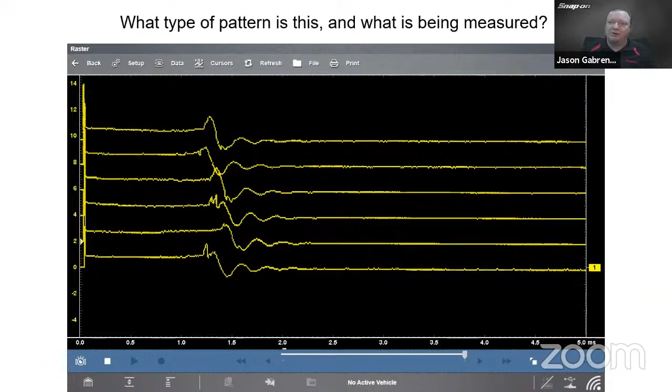So the tech decided, well, maybe we need to change the driving conditions, change the engine conditions. So they decided to do a brake torque - you put it in drive, smash the brake, smash the gas, get that engine to torque up real good and put it under a good load, and see what happens. So this pattern is what came of it.

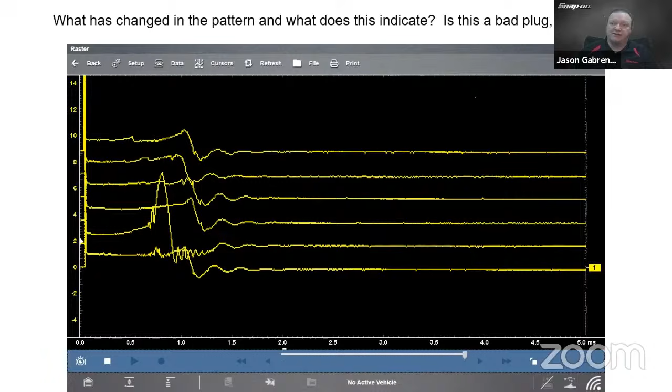So on this one cylinder - this was cylinder 5 - they detected by doing this test that there's a lean condition on this cylinder. So it wasn't even an ignition problem, it was actually a fuel delivery problem, and it ended up being a bad fuel injector on that cylinder. It wasn't spraying enough fuel under a load. So it doesn't even have to be an ignition problem that you find while doing an ignition test. In this case, it was a fuel problem. So then we'll talk through this as we go.

All right, let's talk about how an ignition system is set up. Really, you can divide an ignition system into two halves. We have a primary circuit and we have our secondary circuit. The easiest way to split it in half is right down the middle of the ignition coil.

Because we have both a primary coil and a secondary coil inside the ignition coil as well. So pretty much the primary circuit is anything attached to the primary coil or that controls the coil. Think battery, that's where our voltage starts. Alternator, ignition switch, ignition control module, cam sensors, crank sensors, pickup coil if it has it, any sort of triggering device, also the ECM depending on how it's set up. So all of that is considered the primary side of the ignition system.

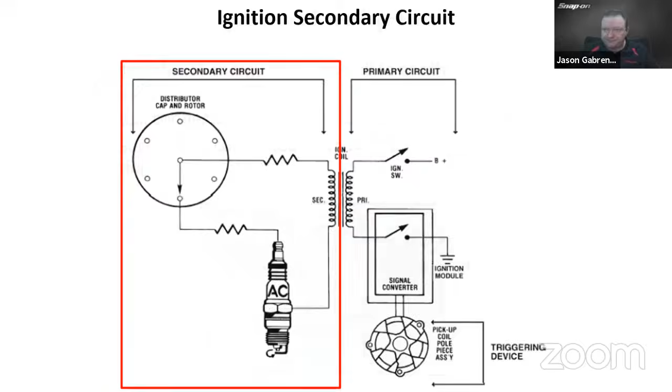And that brings us to mutual induction. This is the essence of how an ignition coil works. It's a transfer of energy from one coil to another when they're placed close to each other. The coil connected to a voltage source is called the primary winding, and a second coil connected to another circuit or the output side would be the secondary winding.

So due to that, when it transfers the energy over, we'll have some math go on. We have 14 volts in, 14 amps in, gives us 196 watts of energy. When it transfers, the energy stays the same, 196 watts total. The volts go up by a factor of 100 because it's 100 to 1. So 14 volts gives us 1400 volts out, and then the amperage goes down by that factor of 100, so we have 14 hundredths of an amp.

So this is how we get 10, 20, 30,000 volts out of a coil. It's just the difference in windings in between, because generally on most automobiles you're going to have maybe 14 volts coming in and maybe up to 14, 15 amps coming in, probably not much more than that because the alternator puts out about 14 or so volts. So it starts charging there, and because of that step up, we have many more windings on the secondary side that gives us that extra voltage.

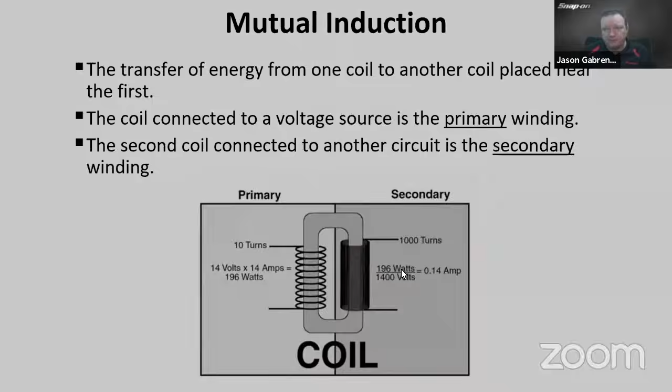So here's a little animation that kind of describes how it works, a very simplified setup. We have the switch - when the switch is thrown and completes the circuit, we have electricity going into the primary side of the coil, that's dwell. It will generate a magnetic field. When we release that energy, release the electricity, that magnetic field collapses and it goes over to that secondary coil, which gives us enough voltage to cross that larger gap on the other side. So that is a super simplified version of how that works, but that's how it works.

Using this mutual induction principle means that whatever affects one side also affects the other side. So if I have a problem in the combustion chamber, I'll be able to see it on the primary and the secondary side. So here's an example graphic here.

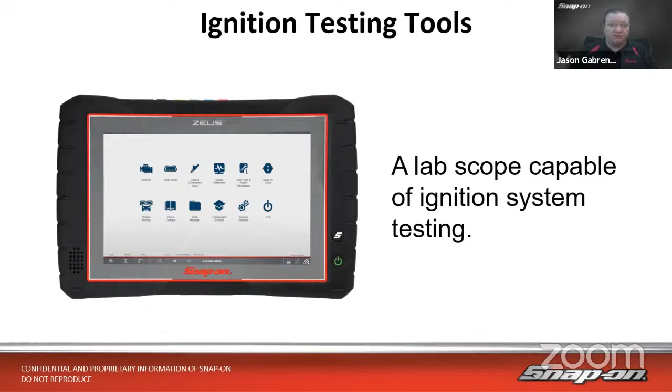So once we've decided on whether we're going to test primary or secondary, what do I need in order to test the ignition system? Well, first off, we need a scope capable of ignition system testing. So any of our tools that have a scope in them are able to test at least single cylinder ignition. So Verus, Zeus, Verdict, Vantage, Modus, Triton - any of those tools will be able to test secondary ignition. The 2-channel tools are able to test a single cylinder, and then the 4-channel tools also have a built-in ignition scope inside them. The Verus and the Zeus at this time would have an ignition scope built in.

What else do we need after we have a tool that can perform this function? Well, we need some adapters. At the bare minimum, you need this adapter cable right here. This end plugs into the tool, whatever channel we're using. That's the ground. And then you see there is a male, what we call an RCA plug on the end. So all of the adapters have a female RCA plug on them, so we can simply plug it in there and then attach it to the tool.

This is an inductive pickup probe, or a capacitor probe, sorry. This is designed for using on a vehicle's spark plug wire. This end of the adapter plugs into the other end there. But we have found, as time goes on, you can actually unscrew the end of this, take that off, and then you end up with a little metal nub at the end. And that little metal nub can be put on top of a coil, and you can measure those coils as well on a coil-on-plug vehicle, just using it like a stick or a wand.

So kind of a nice little dual use. You may even have one of those in your toolbox. We've had these around for a very long time, and they still work with the tools we have.

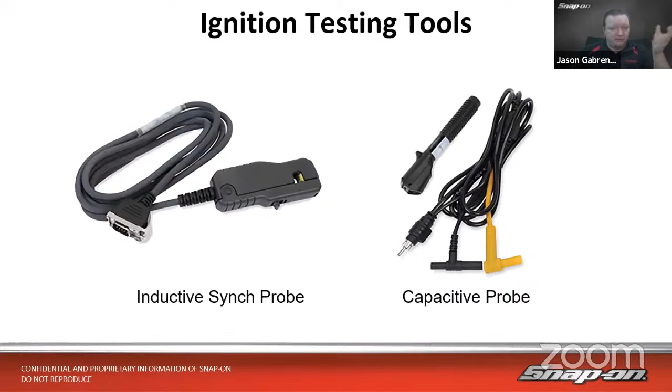Also, an inductive sync probe - this is good for doing multiple cylinders at the same time. This would plug in on the top of a Verus or a Zeus, that funny looking connector on the top of the tool, that's what goes in there. So we would use that around a spark plug wire, or you could also use it on a coil-on-plug vehicle for the trigger for the coil. You can put it around that trigger wire as well, and that will also tell the tool where number 1 cylinder is, so it knows the firing order, needs to know where number 1 is. We also have a multitude of other adapters we could use for coil-on-plug testing.

This first one here is a wand or a stick pickup. You could touch the top of a coil and it would work like that. Or if you had an inline 4-cylinder, or 2 banks on a 6-cylinder, or 2 banks on an 8-cylinder, as long as I can get it across the top of all the coils in line, I can measure all the coils at the same time.

The most economical way to get into secondary ignition testing would have to be these flag pickups right here. They're available in singles, doubles, and triples. They have a male end and a female end, so we can daisy chain them together. If you were here at the very beginning, we showed a little video on how to hook these up. So male end, female end, and then you can just daisy chain them together to get however many flags you need.

We also have 11 different part numbers of vehicle-specific coil on plug adapters, anywhere from a Ford or a Lexus or a Volkswagen. There's also the most popular one, I think, the COP1. That's for the Ford coils that are round and have the little flat spot on the side where the plug goes in. It clips right over that flat spot and allows you to read the coil from there. There's also one for, say, GM HEI, so if you have any of those, you could use that as well, getting right to the coil at the top of the cap. Multiple different versions for multiple different vehicles, and there's a couple that are even adjustable, so they fit multiple vehicles. Definitely something to check out if you're interested.

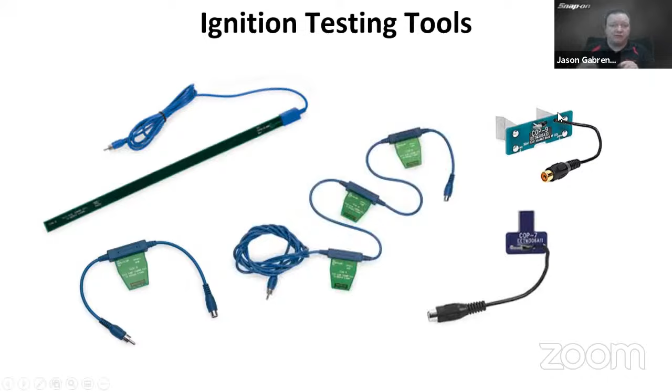We also have this SIA 2000. You may have seen this before, it's been around for a while. It was originally designed for what we call waste spark vehicles. On a waste spark vehicle, think back to late 80s, early 90s, mid 90s GM vehicles, many of those cars had these waste spark systems, the coil packs with the 2 towers that clipped onto the ignition control module. They'd fire both towers at the same time, one on the ignition stroke, one on the exhaust stroke of a companion cylinder. So one side is getting a negative polarity, the other side is a positive polarity.

The back of this tool is actually marked with a plus and a minus. You plug in the negative side to the negative side, the positive side to the positive side, and you can see all cylinders on the screen at the same time when they fire. Newer versions of these also come with 2 umbilicals that plug in on one side, and they have 4 wires each, and those are male RCA adapters. So you could use up to 8 of those coil on plug individual flag pickups, if you will, with this tool as well. So it kind of gives, once again, another dual expanded use on that.

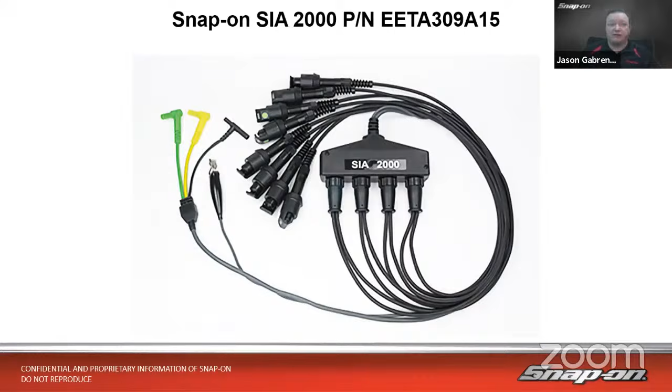So that is available. Once I have all of my adapters and my tools ready, how will I go about approaching testing this? There are 4 main patterns that we would be using when testing ignition. The one that anyone can do, as long as they have a tool with a scope, would be single cylinder ignition. This allows us to see 1 cylinder, maybe 1.5, 2 cylinders, depending on how we have it set up. But that's really used for voltage comparison: how high is my firing line, how's my spark line look. We can take a look at the pattern using that single cylinder.

And that's the one that you'd want to look at. So it allows you to test that way and compare that way.

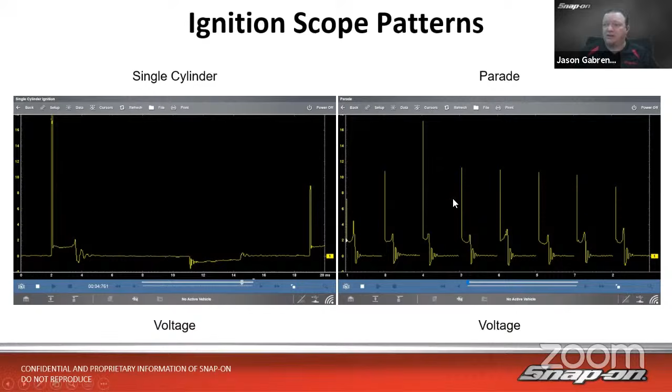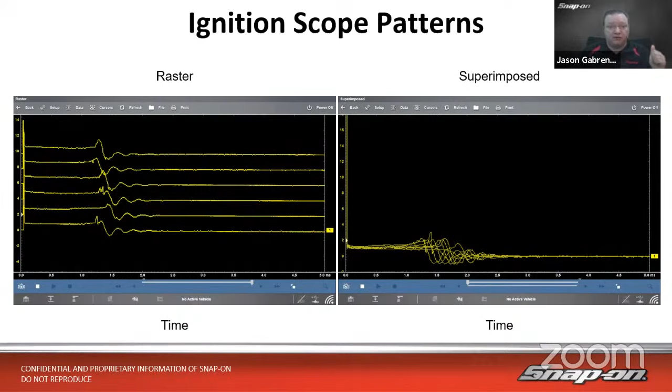The raster, the superimposed, and the parade patterns are available on the ignition scope tools, so on the Verus and the Zeus. As I said, everyone else can do the single cylinder.

So once I decided how to test it, what tests can I do? First off, we have a primary voltage test, and that is very simple because we don't even need any adapters. We just need maybe a back probe in order to back probe at the coil or the coil connector. So in this case, the coil on plug vehicle, we have a back probe going in there, and we are going to test it on the voltage supply side to see the primary voltage going in.

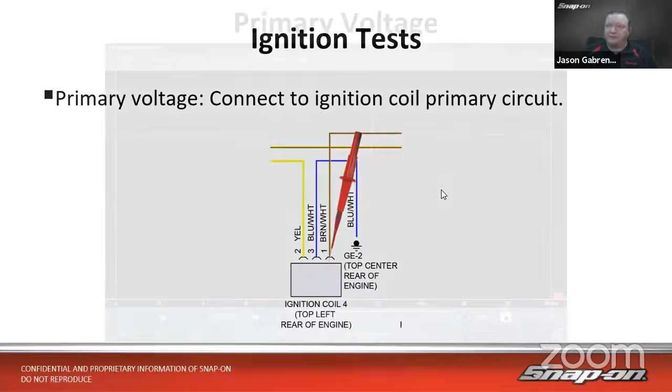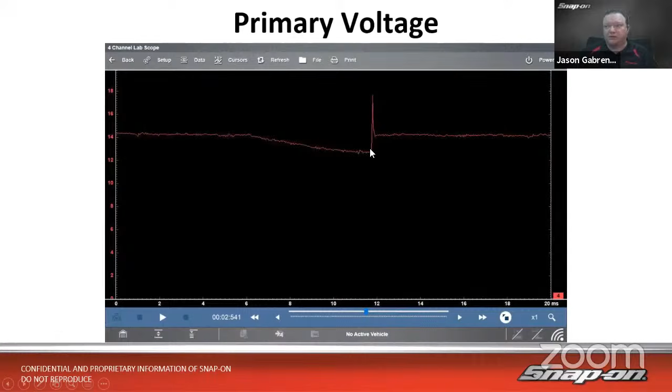Now in this vehicle, it works a little bit differently than some other vehicles. So when dwell starts on this, the voltage starts to go down, and then when it fires, it goes up. It actually starts to drop because it's storing it in the coil, and then it fires. And then we don't see the spark line there.

If we were to overlay it with the secondary side, here's my secondary on the bottom. So there's where dwell starts, there's my dwell, and then there's my firing line there. And then we can see all of that occurring. So that's primary.

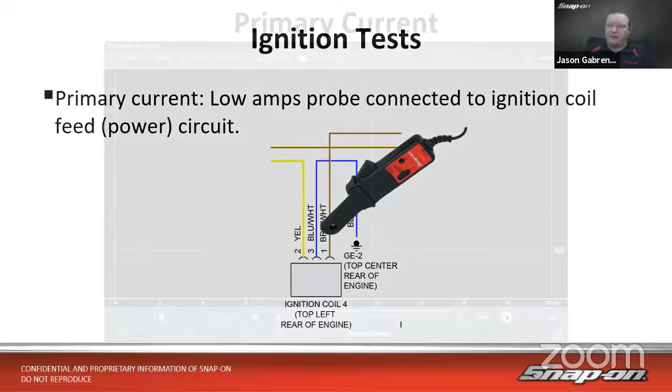Secondary side, primary current test would be the second test that we're going to do. So you hook a low amps probe to the ignition coil feed circuit, the power circuit, the same wire we used before for the primary side. You hook it in there around the wire, and you will see the coil current going into the coil.

So this is an example of a known good primary current ramp test. We see the current is 0, and then when the dwell starts, we should see a nice smooth ramp come up like this. If it went up sharply and then over, that would indicate a problem inside the coil, inside the windings, and the primary windings could be high resistance that the amperage needs to overcome.

In this case, this is what we call a current limited coil. So it looks like at around about 12 amps, it just levels off. If it wasn't current limited, it would come up and then come down like a triangle, with a sharp point at the top.

We overlay that with the secondary side. We see dwell starts, amperage rises, then it levels off, and then when the coil fires, all the amperage goes away, and we should see it line up like that. Here's an example of a bad current test on a vehicle.

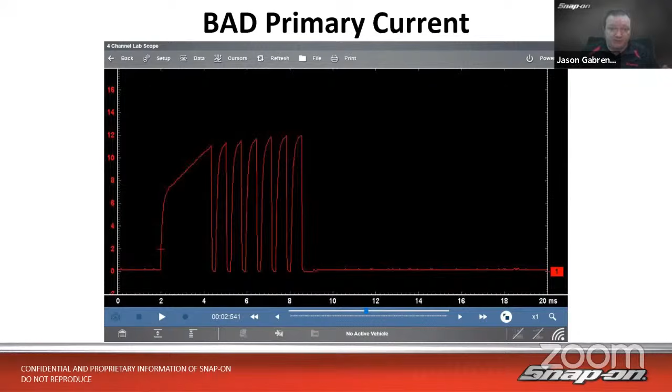This is on a BMW. Fords have this system as well. I'm sure other manufacturers also use that type of system on some of their vehicles. So if you see something like this, don't be worried that there's something wrong with the vehicle. It's probably normal in that case.

Then if we replace that coil, here's what a known good on this car would look like. So once again, it's a BMW.

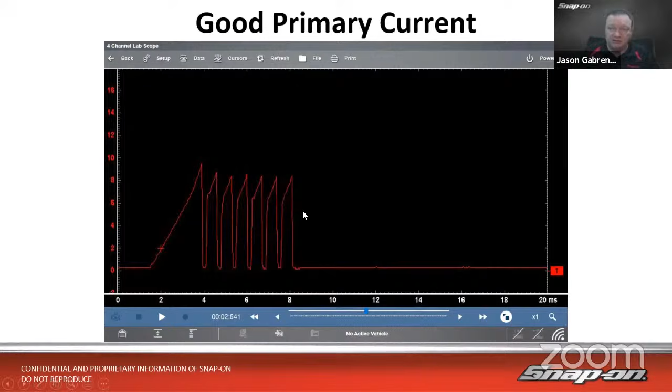Here's a normal coil ramp. In this case, it's not limited, so it just goes up until it fires. Since we have extra resistance inside the coil, because we have all the extra voltage, you'll see on the successive sparks that sharp upward ramp, and then it kind of looks normal. You can see it sloping down here a little bit too as the energy dissipates throughout the coil. So you can see all the differences in the pattern that way.

So now let's look at ignition control signal. In some cases, you have a coil with an internal ignition control module, and the ECM generally sends out some sort of signal to tell it to turn on. So in this case, we'll hook up to the control signal. You see it's a 5-volt square wave - many times it's a 5-volt square wave. When the square wave turns on, that's where dwell starts. Where the square wave turns off, that's where it fires.

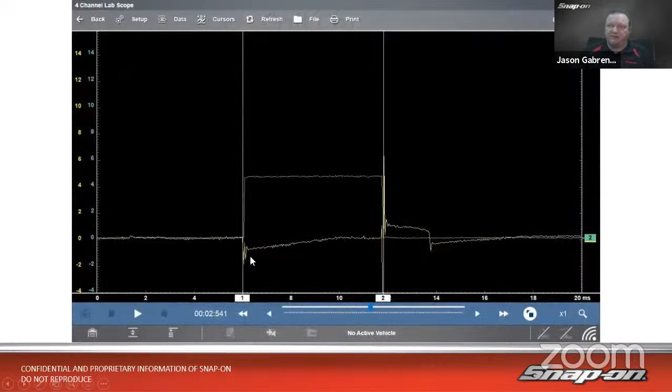If we were to line it up with the secondary, once again, dwell starts there. As the square wave comes on, goes across, and comes down, that's when it fires. So we can see how everything relates over time.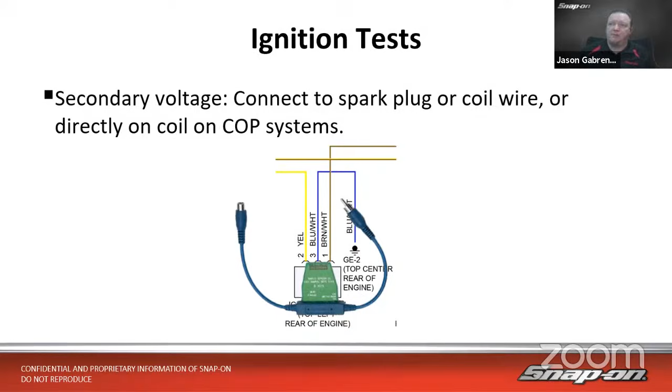And then we have secondary voltage. We're going to spend a bit of time on this section because there's many different things we can tell about that secondary pattern. We want to connect to the spark plug or the coil wire if it has those, or directly on the coil if we have a coil-on-plug vehicle. In this case, we have a flag. We put it on top of the coil, and there's our secondary ignition pattern. We can see that dwell pattern, the firing line, and the spark line.

And that brings us to a known good pattern. This is known good out of a textbook, showing what a common ignition event looks like on the screen.

We've talked about it a little bit already, but we have dwell here - you'll have these oscillations as it's starting to charge, things bouncing around as it charges up. Then when it's time to fire, we have this tall firing line. The firing line represents the voltage needed to cross the spark plug gap and get that spark going. It takes a lot more energy to ionize that gap than it does to actually keep the spark going. So when you get to the spark line, you'll have a big drop off, and then you'll see the spark line come out considerably lower.

Then, depending on how efficient the coil is, you may see coil oscillations at the end - these ups and downs are basically the energy dissipating out of the coil. You may have heard the term before, wringing out a coil, like you wring out a towel to wring out the water - in this case, we're wringing out the electricity inside the coil. If the coil is more efficient and uses most of its energy, you won't see one or any of these oscillations. Then it goes out, waits for a little bit, and when dwell starts again, we see the oscillations. That brings us back to the left-hand side.

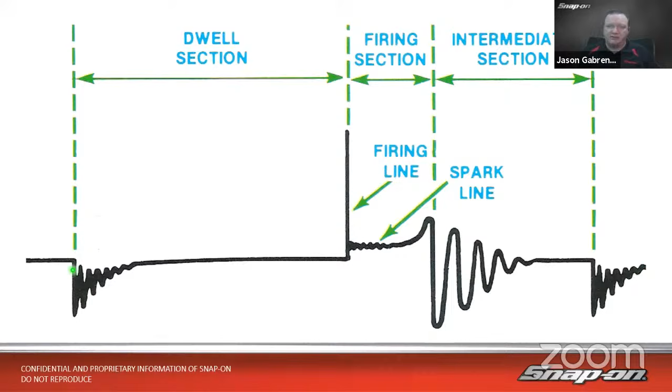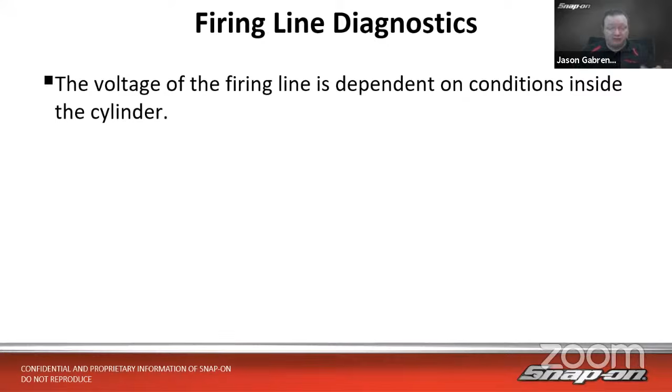So let's talk about diagnosing this pattern. We have the firing line first, because that's the first thing in the pattern. The voltage of the firing line will be dependent on conditions inside the cylinder, also conditions of the equipment. High firing line voltage can be caused by wide spark plug gaps due to the distance it has to travel, lean air fuel mixtures because there's less hydrocarbons to burn - so lean equals high voltage - high cylinder pressures, where molecules are pushed tightly together due to compression, requiring higher voltage, and retarded ignition timing because of where it is in the compression cycle of the engine.

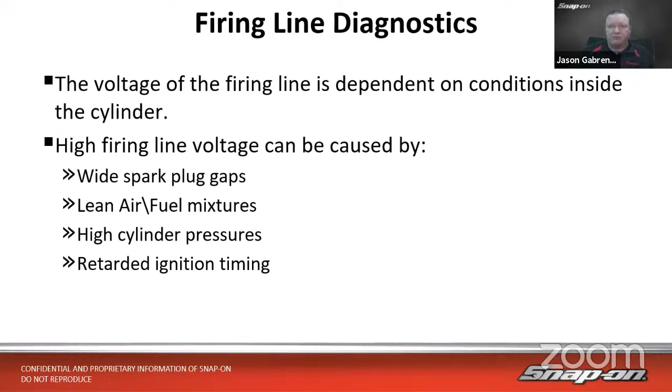Also mechanically, say you had high resistance in a spark plug wire, or high resistance in a cap and rotor, depending on how the vehicle is equipped - that could cause a high firing line as well. You want to check the firing line either as a single cylinder, which we can all do, or with other cylinders for comparison.

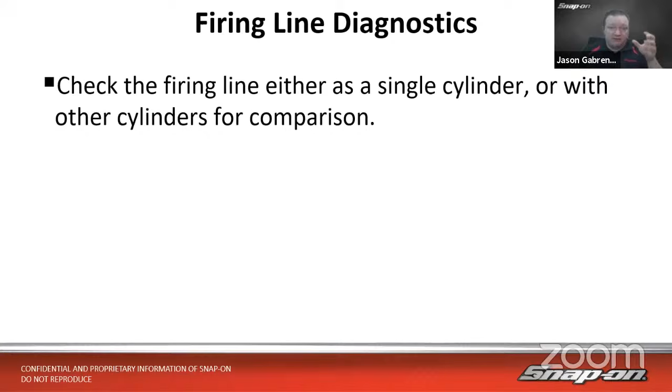Even if you were doing a single cylinder test, you could test one cylinder at a time and just note where each of the events were. Typical tests we could do are a cranking test, a cruise test where we hold it at about 2,500 RPM, and then a wide open throttle snap test.

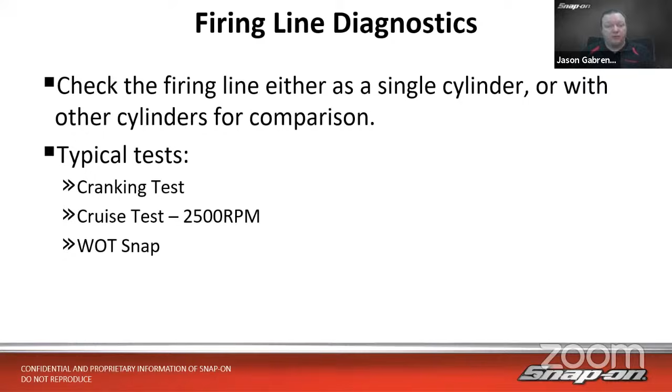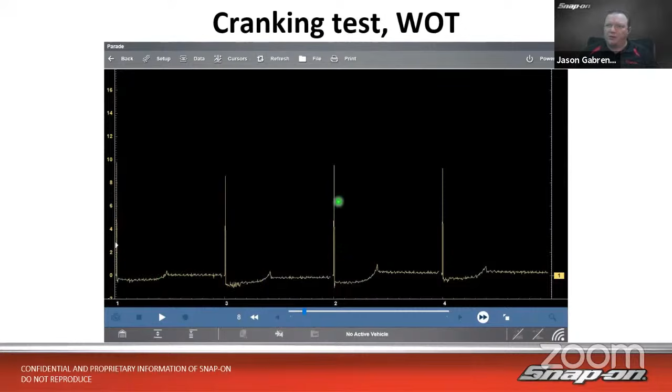Here's an example of a cranking test on a 4-cylinder. This was wide open throttle because this vehicle had a fuel cut, and we didn't want it to start. So if we hold it at wide open throttle, we go into fuel cut and don't start. It looks like about 10,000 volts on each, with pretty good lines here where the spark is occurring. There's not a lot of turbulence because there's no fuel in the cylinder. So that's just a regular wide open throttle cranking test.

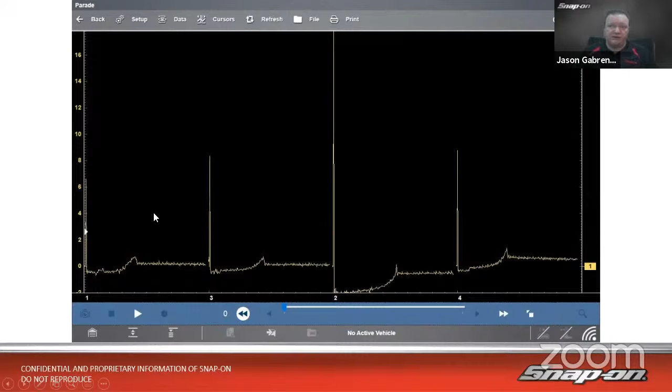Here's an example on a different vehicle with a bad coil. This is a 6-cylinder vehicle with a single coil, cap and rotor. You can see how it's trying to put out enough voltage to cross that gap, but we don't see any sparks occurring there at all. It's just a very weak coil, not able to put out nearly enough voltage to cross that gap.

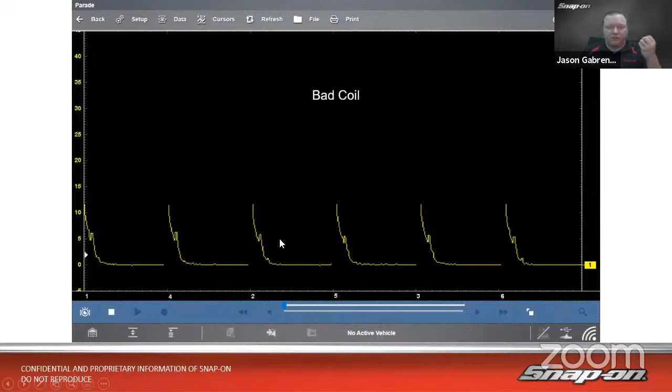Back to that 4-cylinder vehicle with the tune-up. Here's a cruise test. So we went from cranking, then you could do an idle test, and then we could do a cruise test where we rev it up to 2,500 and hold it there. Due to the timing advancing, the firing lines go down. So we were up at 10, now we're down at about 3, maybe 4. It comes down quite a bit, and then we start to see more turbulence in our spark lines as well.

So why do we get turbulence? Due to the swirl inside the cylinder, due to how everything's air-fuel mixing and atomization and all that. It's not exactly a perfectly even mixture across the board everywhere in there. So as it gets a little bit richer, a little bit leaner, a little bit richer, a little bit leaner, the voltages go up and down.

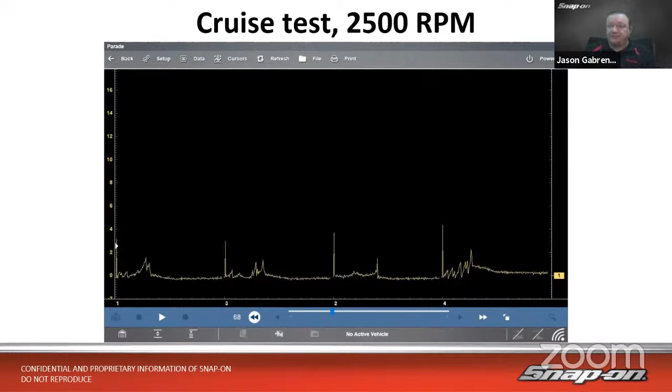Then here's a wide open throttle snap test. You take it and snap the throttle all the way to wide open, let it rev way up, and see what the cylinders do. So now my firing lines go up, and my spark lines are shorter, much shorter. They also have considerably more turbulence because at 4,000, 5,000 RPM, wherever this happened to be, you'd see quite a bit more turbulence inside that cylinder. It's spinning much faster, so we don't have nearly as much time to have a spark happen. That's what we can see in there.

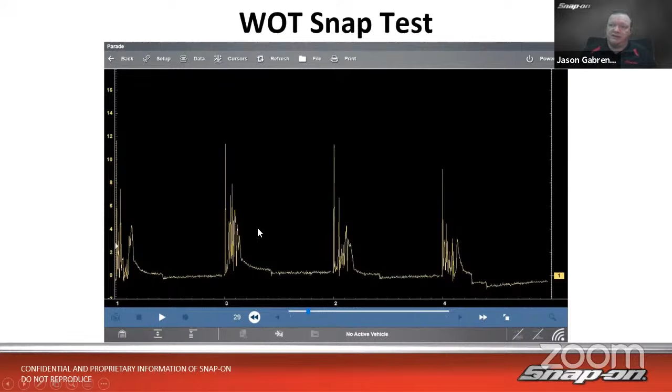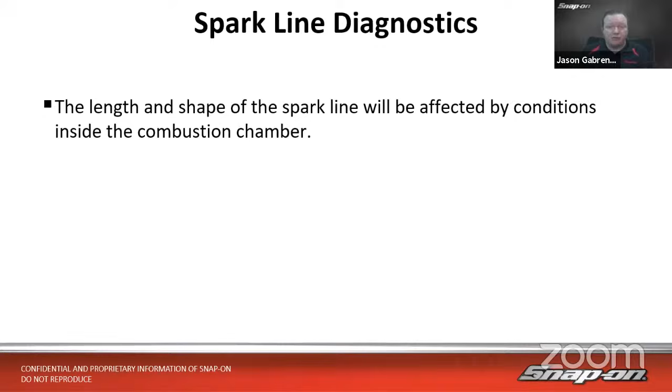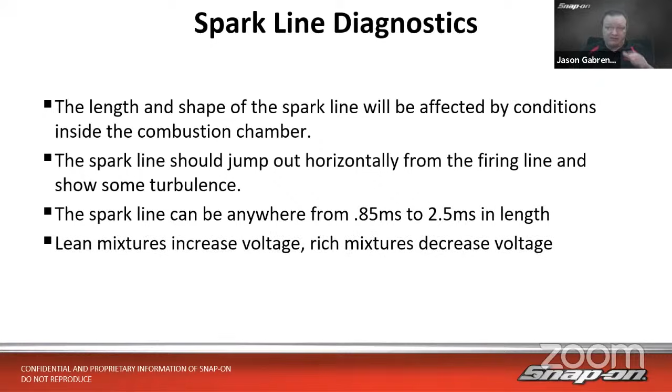So this is on a known good vehicle, and that brings me to the spark line. The length and shape of the spark line will be affected by whatever's going on inside the combustion chamber, rich and lean mixtures, etc. The spark line should jump out, be fairly horizontal from the firing line, and show some turbulence, those ups and downs we talked about. The spark line can be anywhere from 0.85 to 2.5 milliseconds in length. Lean mixtures increase voltage, rich mixtures decrease voltage. So just remember, lean goes up, rich goes down.

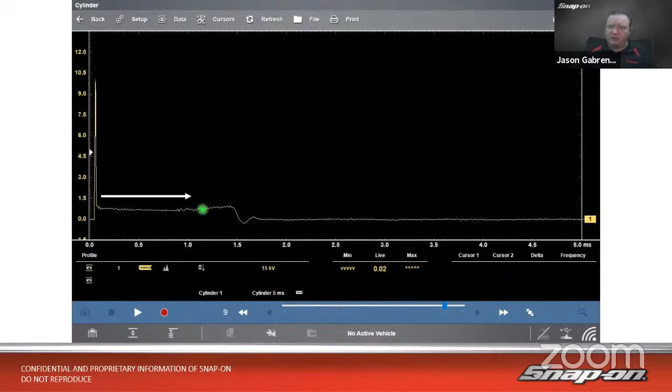Here's an example on a known good vehicle, a different vehicle. This one had spark plug wires, so we clamped around one spark plug wire. You can see it's nice and straight, nice and horizontal. This was captured at idle, so very little ups and downs here. It was very smooth running, and we see it's fairly level, with a couple little coil oscillations there.

This is the same vehicle, same cylinder, and we introduced a lean condition. You can see it goes through, and it's pretty good here—level at first, but then it goes up towards the middle and towards the end. We have these additional coil oscillations because it just wasn't able to burn enough fuel. The vehicle almost stalled when we did this. So level, then leaned out.

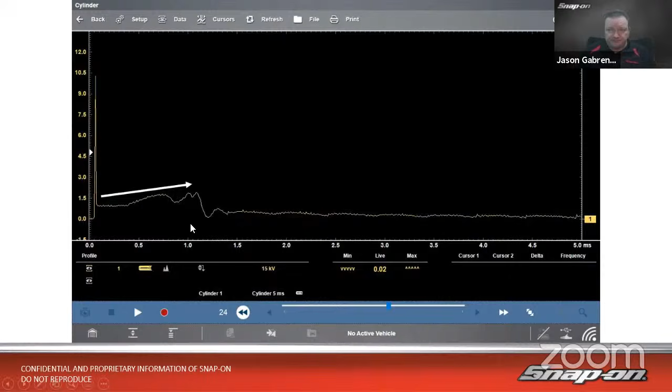And here's back to the vehicle with the tune-up. Before we did a tune-up, we wanted to take a look at the pattern. This is actually a rich condition. You can see my firing line, my spark line comes down, and then it levels off right there—we have that little bump before it ends. That is a rich condition.

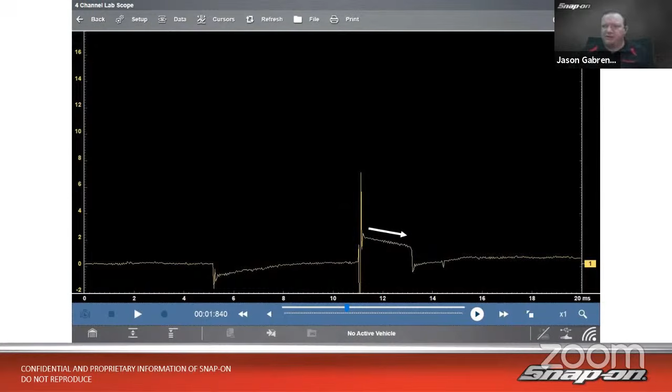And this one is the same vehicle, same cylinder, after we replaced the plugs. We can see it's pretty straight—we don't have that bump on the end. The reason it's angled down like that, I think I'll chalk up to the probe we were using; it's kind of hard to keep it steady at all times. So in this capture it just happened to be sloping, got a little bit of a wave going on there, but it is straight. The firing line, spark line is pretty straight there, right?

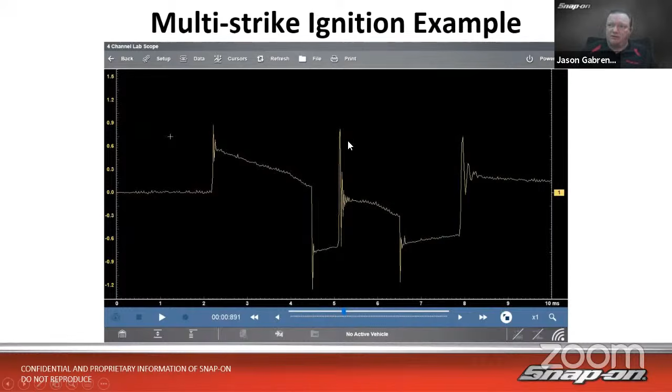I just wanted to show an example of a multi-strike ignition. This is on a Ford Edge, and we can see we have multiple strikes going on inside that ignition event. This was at an idle—we have multiple firing events going on there.

So now let's talk live on the tool.

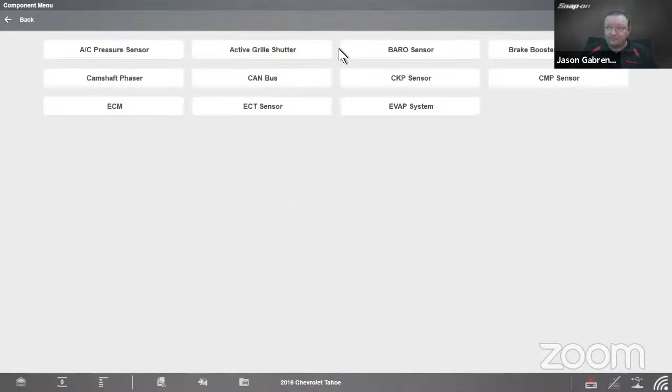Once we load into a vehicle, as I said VIN-specific, it brings up our different categories of systems we could test. In this case, I'm going to test engine. Once we load into that, we'll see different components we can test or subsystems as well. So in this case, I want to do an ignition test because that's where my ignition tests are.

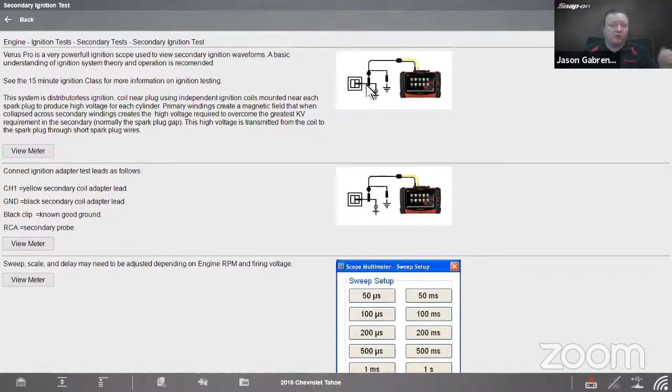We could do component information, which tells us all about the ignition system. Primary tests will tell us about the primary side. We spent a lot of time talking about secondary tests, so let's take a look at that and do a secondary ignition test. In this case, on this vehicle, it's a coil-near-plug system, so it has individual coils for each cylinder and a short spark plug wire that goes between the coil and the spark plug. So we can test each individual spark plug wire or hook up to all spark plug wires if we wish to. It tells us how to hook up, and also tells us sweep, scale, and delay may need to be adjusted depending on the RPM.

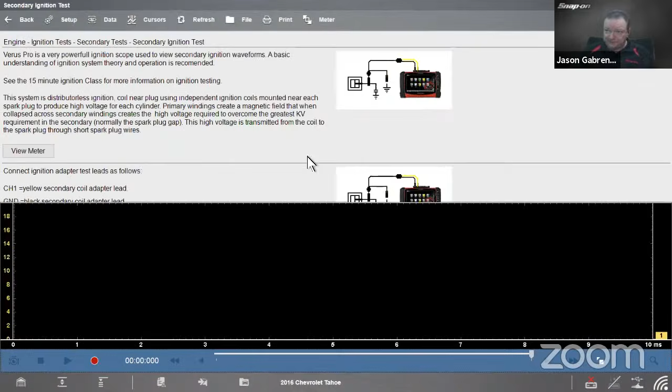If we go down here, it gives us a known good pattern—there's our known good ignition pattern. By hitting view meter, I'll go to my home screen and load out of what I was looking at in the last class. Okay, there we go, so there is my meter. Let me close out of this here, just back up one, go back in there. Here we go, view meter. When we hit view meter, it'll automatically set the voltage and automatically set the time where it needs to be.

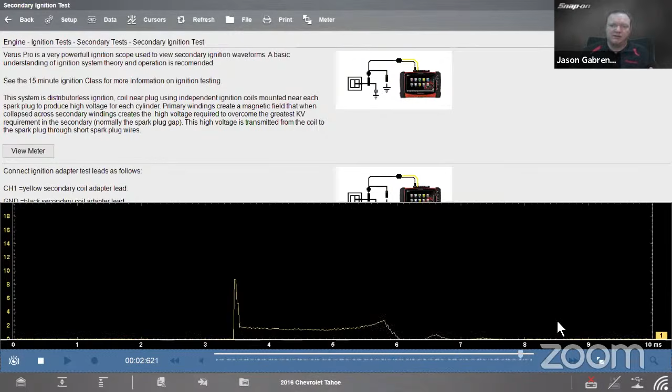All right, so I do see an ignition pattern on here. Looks like I'm looking at about 20,000 volts range and about 10 milliseconds in time. So that's a pretty good place to start.

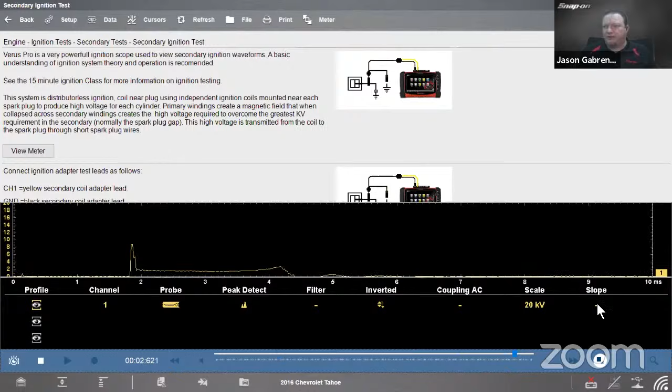Looks like it is moving around quite a bit on here, and I want to lock that in place. The one thing it hasn't done for us is turn on our trigger point, which allows us to lock the pattern in place. So if I go over here, I can turn on my trigger. That slope right here would be to turn on the trigger. So if I click on that, it turns on my trigger point, which it's indicated to me is over here to the left. Drag that up, put it somewhere in the pattern, and it will catch that pattern when it goes across the screen.

Anytime that voltage range crosses that plus sign, it'll hold it in place and freeze it on the screen. Now I do have a little bit of negative voltage going here, so I'll just lift it up. And there we go. So I can see dwell, firing line, spark line, and then my recovery oscillations there. So that is single cylinder ignition testing.

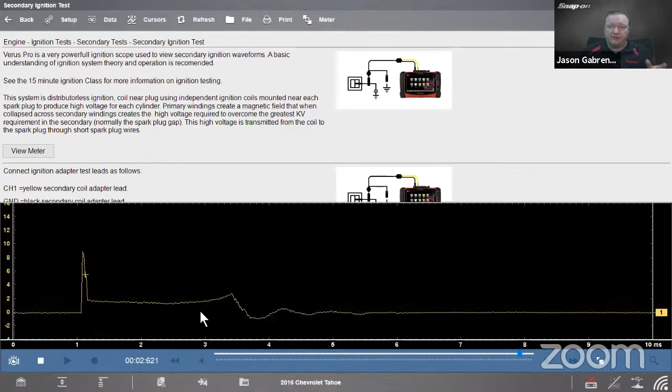And like I said, very easy to do if we use the guided component testing. So now let's talk about ignition scope.

So to do that, if you have a Verus or a Zeus, you can go into where it says scope multimeter. And then we see we have the lab scope, and then we have the ignition scope. So this is a true ignition scope that we can use to check our parade pattern, our raster pattern, etc.

So you see it gives us patterns to start with. We could do single cylinder ignition, that's like what we just did on the previous screen. So I'm going to start with parade. So we click on parade, it'll set it up for us, and we will see what we see on the screen.

Now, in this case, on my tool, it was already set up because we did this before. But on your tool, if you've never been in here before, you may need to do some setup functions because it defaults to different settings than what you might be used to. So to change my settings on my ignition scope, I can go up to setup, and then I can go to setup again because I want to set up my ignition. Once we've done that, it defaults to waste spark, right?

When you're on any of these pop-up windows, just FYI, you want to hit the back button, not the exit button. If you hit the exit button, it closes all the options down, and you have to click back in to get there. If we hit back, it just closes that one window.

We can also set the firing order. So I just set it to 1-8-4-3-6-5-7-2, that's small block Chevy, right? Hit back. Then we can tell it where it's triggering, number 1. So we trigger it off the plug, so you can put it on the plug wire, that RPM pickup, right? That inductive sync clamp, I can plug it on there.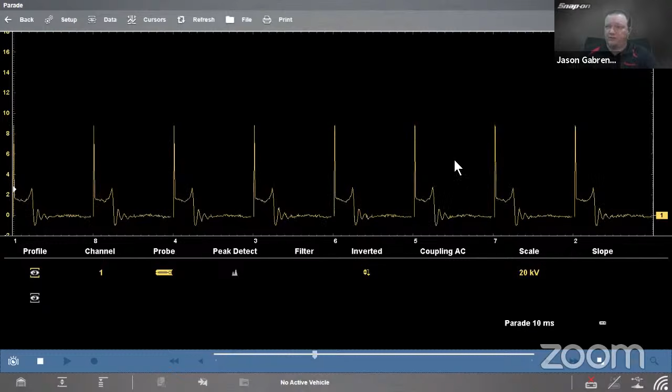You see the difference between the two is this little triangle right here.

So this triangle is my trigger point. Remember on the single cylinder ignition test we did, it had a plus sign as a trigger point. In this case, this is our vertical. We can only go vertically, and it's only where it crosses.

Also, a good suggestion: if you're doing an ignition test with one of these tools and having trouble getting a pattern, check where this trigger is. If it's too high, you'll just have a blank screen. If the voltage never crosses where this triangle is, you won't see a pattern, since it only draws a pattern from where that is. If I bring it down about here, now it crosses the pattern, and now we can see it on the screen.

Now, how do I cycle through my individual cylinders? If I go down here on the bottom right-hand side, we have this little picture of a clamp, and it gives us an option to trigger off of whatever cylinder we're using - cylinder 1, cylinder 2, cylinder 3, cylinder 4. You won't see any difference on this screen because the simulator puts out the same signal every time, but on a real-life car, you can see the difference between cylinders.